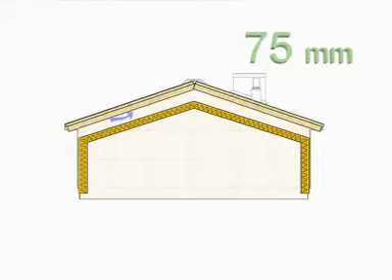Before fitting the shingles, check that there is sufficient ventilation for the underframe. Ventilation is normally provided on the cold side of the roof structure, between the thermal insulation and the underframe. The distance between the thermal insulation and the boarding must be at least 75 millimeters. However, it is not sufficient just to have a ventilation gap. You must also ensure that air can enter the gap from underneath the eaves and exit through either a ridge vent or ventilation holes.

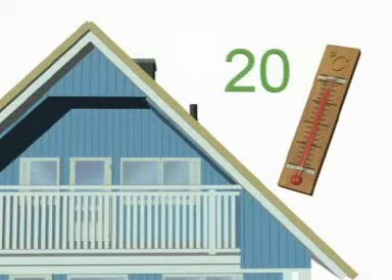Lemminkainen roofing shingles can be fitted on a roof with a minimum inclination of 1 to 5. In practical terms, this means a maximum of 5 meters of roof surface for each meter of elevation. Overcast weather and a temperature of about plus 20 degrees centigrade are the ideal conditions for fitting shingles. In any event, the temperature should be above plus 5 degrees.

The underframe of the roof must be solid and even. It can consist of rough tongue and groove boarding or moisture-resistant construction board. The thickness of the substrate material depends on the truss spacing. Even old felt roofing from renovation sites will do as a base, provided that it is flat and firmly fixed

on the underframe. When the roofing shingles arrive at the site, they should be stored on level ground and protected from rain and sunshine. The easiest way to do this is to cover them with a light tarpaulin.

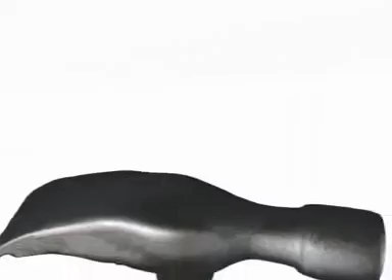You will need the following tools for fitting the roofing shingles: a good hammer, a Stanley knife, a sufficiently long measuring tape, a silicone sealant applicator, a steel spatula, and a carpenter's pencil for marking.

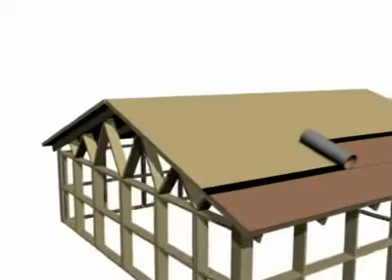Start the roofing work by fitting the underlay membrane parallel to the lower eave. Fix the top edge of the membrane with felt tacks at intervals of 15 to 20 centimeters. The next membrane sheet is placed on top of the previous sheet with a minimum overlap of 10 centimeters and nailed onto the underframe. Remove the protective plastic from the adhesive edges and attach them to each other.

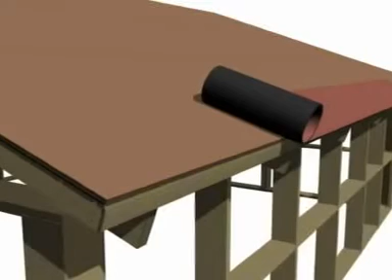Use a knife to chamfer the upper edge of the eave. Roll open the eave strip and remove the protective plastic. Bend 1.5 centimeters of the strip over the eave and nail it down at 5 centimeter intervals.

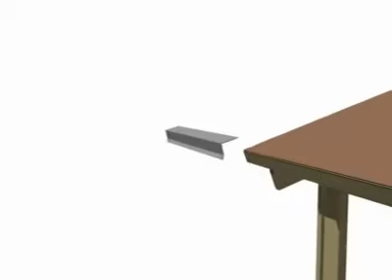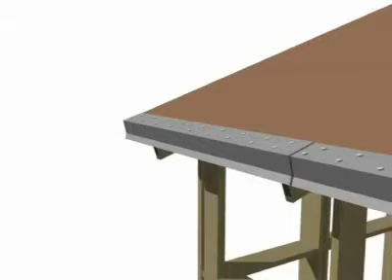Another alternative is to use an eave molding made of sheet metal. The moldings are put in place with a 3 centimeter overlap and nailed down using a zigzag pattern and 10 centimeter spacing. A self-adhesive pikipoika eave strip is then fitted onto the eave molding with an overlap of 5 centimeters

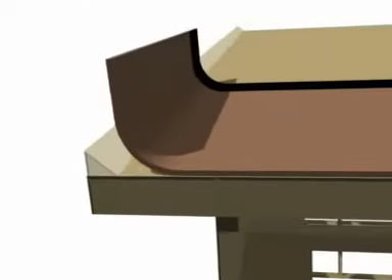at the joints. At the gable eave, a triangular batten is fixed below the underlay membrane. The membrane is stretched around the batten. The roofing shingles are brought to the side of the batten and fixed with jointing glue. The eave is finished using a gable eave molding.

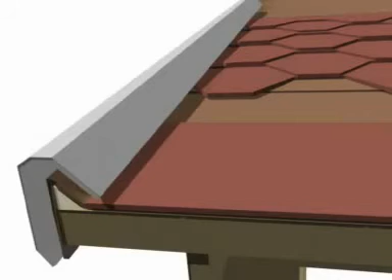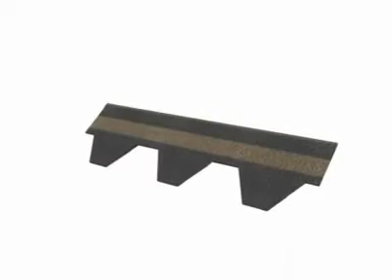Roofing shingles are lightweight and easy to work with. They have 2 separate adhesive strips. The narrow strip is intended for aligning the shingle so that its position can be checked before finally fixing it with the other adhesive strip.

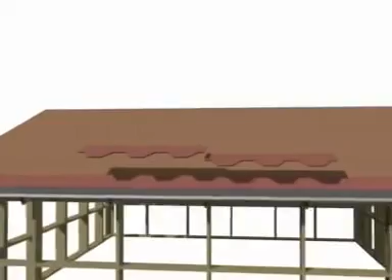Start by fitting 1 shingle on each side of the center of the lower eave. Remove the protective plastic from the alignment strip and press the shingle into place. If you like, you can align several shingles before finally fixing them. Then remove the protective plastic of the lower adhesive strip and firmly press the shingle into place.

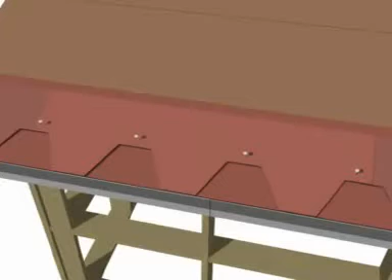Use 4 felt tacks to attach the shingle, placing them 2 centimeters from the upper edges of the notches. You can also use staples that are at least 1.6 millimeters wide. At the end of each row, the shingles are cut along the edge of the gable eave and their ends are fixed by applying a 10 centimeter wide strip of jointing glue.

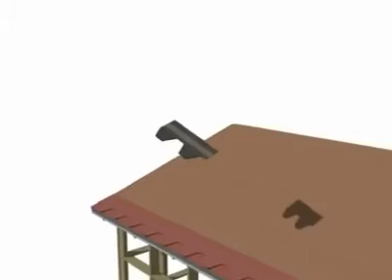When the first row of shingles has been nailed down, start the next row using the waste piece left over from the previous row. The lips of the shingles of the new row are aligned with the notches of the previous row. In this way, they will also cover the tacks.

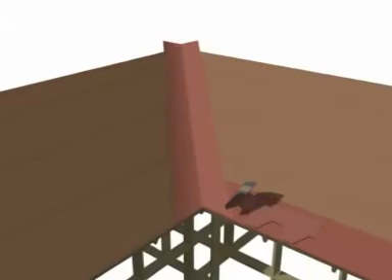The valley on an L-shaped roof is put in place using an adhesive eave strip. Remove the protective plastic behind the strip and nail it down using 10 centimeter spacing. If you're using Supra 10 Plus membrane, fix it at the edges with jointing glue.

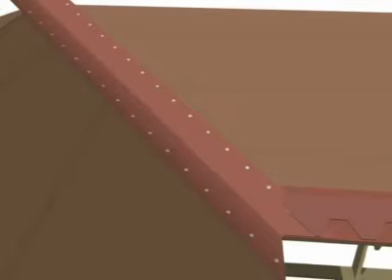Leave a 15 centimeter area at the bottom of the valley free of shingles. Cut the ends of the shingles parallel to the valley using an alignment board. Fix the shingle ends with jointing glue.

Ventilation pipes and other small lead-throughs are sealed by cutting a hole in the underlay membrane with a diameter measuring about 10 millimeters less than that of the pipe. A special lead-through seal is fitted around the pipe according to the manufacturer's instructions.

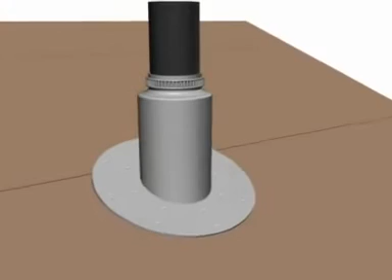A piece of underlay membrane measuring about 60 by 60 centimeters is placed between the lead-through seals and the shingles using jointing glue.

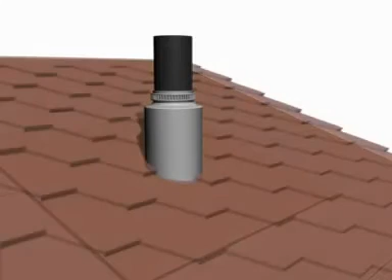The bottoms of chimney stacks or other large lead-throughs are rounded off using triangular wooden battens. Place a separate piece of underlay membrane measuring 30 centimeters against the lead-through and attach it with jointing glue. Fix the shingles below the lead-through and on each side of it to the top edge of the triangular batten.

Cut strips of membrane for the base of the lead-through and raise them at least 30 centimeters against the sides of the lead-through. Fix the strips to the underlay membrane and the shingles using glue. Finally, protect the entire structure with sheet metal.

Cover the ridge with ridge shingles. 4 shingles cover 1 meter of ridge. Remove the protective plastic. Press the ridge shingle into place and attach it with nails in such a way that they are overlapped by the next shingle. The last ridge shingle is not nailed down, it is only fixed with jointing glue.

Alternatively, a ridge vent can be fitted along the entire ridge. It will ensure a continuous flow of air along the roof structure. The ridge vent is fixed with nails and covered with a self-adhesive bitumen strip.

Bitumen roofing shingles are manufactured in 2 cut shapes, the traditional diamond-shaped K-type and the wavy S-type. You can select the color of your roofing shingles from more than 10 alternatives.